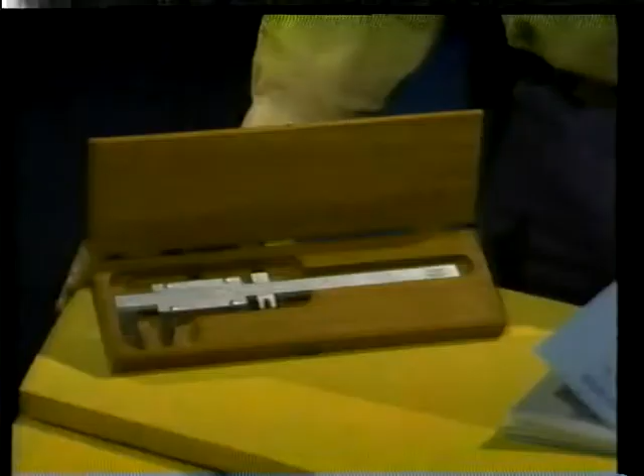For such precision measurements, we need precision tools. Now, as a general rule, the more precise a measurement tool is, the more delicate and expensive it is. So, as we talk about precision measurement tools, we'll be seeing certain precautions to be taken when using and storing them. Precautions like storing them in wooden boxes to protect them from being damaged.

The first precision measurement tool we'll be talking about is this one, the Vernier Caliper. The Vernier Caliper gets its name from the 17th century French mathematician Pierre Vernier, who invented the principle this tool is based on. Now, the first thing you might notice is that the Vernier Caliper is very similar to the slide caliper. Like the slide caliper, the Vernier Caliper has a fixed jaw and a sliding jaw that moves along the shank of the frame.

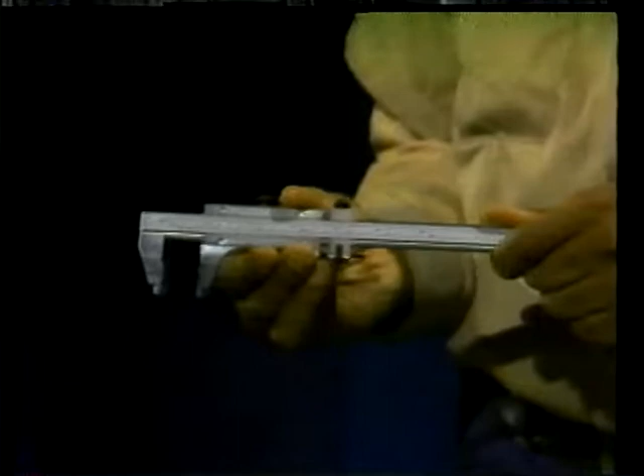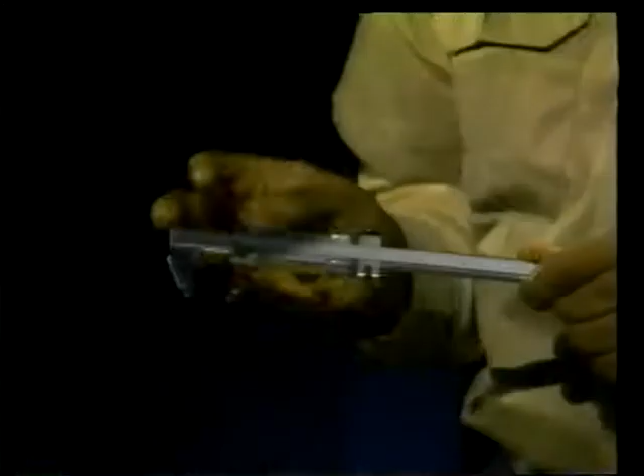The main scale is stamped along the length of the shank. Like the slide caliper, the Vernier Caliper can take inside and outside measurements, but the measurements must be taken using different parts of the scale. On this Vernier Caliper, the upper scale is used for inside measurements, and the lower scale is used for outside measurements. But this arrangement will vary with different Vernier calipers, so when taking measurements, be certain to use the correct scale.

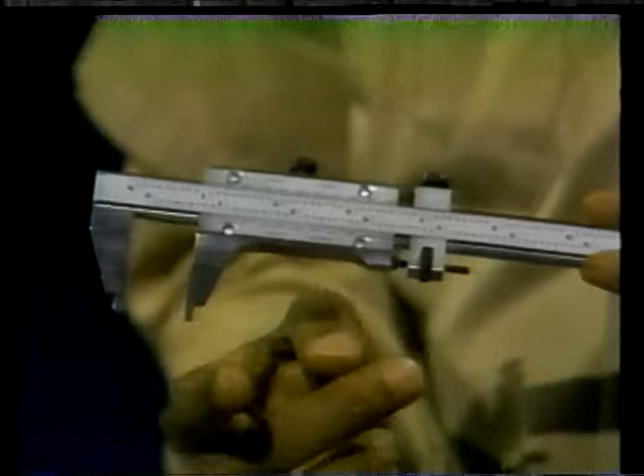The major difference between sliding calipers and Vernier calipers is this second, smaller scale on the sliding jaw. This is the Vernier Scale, and it's what makes this tool a Vernier Caliper. Notice also that there's a special adjustment device attached to the sliding jaw. The adjusting nut at the bottom of this device is a kind of fine-tuning adjustment. Turning the nut one way or the other moves the sliding jaw back and forth very gradually. Using this Vernier Caliper, we can get measurements accurate to a thousandth. And once you learn how to read the small Vernier scale accurately, you can get fairly precise readings for ten-thousandths also. So, before we attempt to measure anything, we'd better look at how to read a Vernier scale.

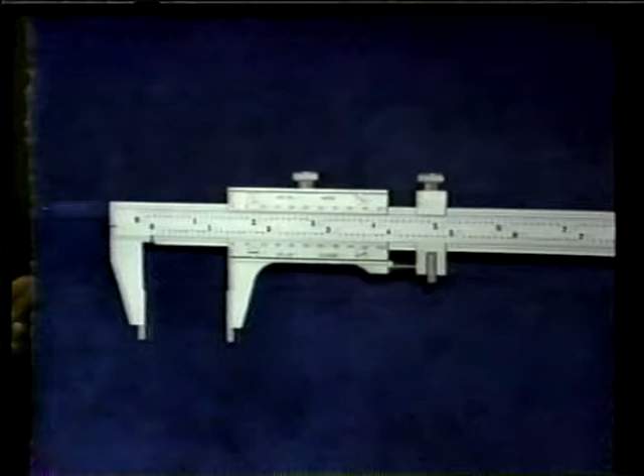Since a real Vernier caliper is too small to see clearly during this demonstration, we've constructed a model. Not all Vernier calipers are identical to this one, but Vernier calipers are similar enough that what we'll learn on this model can be applied to most Vernier calipers you'll work with. Here we have the fixed jaw, the sliding jaw, the main scale, the Vernier scale, and the adjusting device. Let's begin with the main scale.

Like other rules we've seen, the main scale is divided into specific units of measurement. This is an English measure Vernier caliper, so the basic unit here is the inch. The large numbers and longest lines represent full inches. You can see that on this particular caliper, there are 10 numbered lines between each set of inch marks. Each of these smaller numbers represents 1/10 of an inch. So, for example, here we have the 1 inch mark, the 1 1/10 inch mark, 1 2/10, 1 3/10, and so on.

In turn, each of the tenths is divided in half. Each of these small lines then represents 1/2 tenth or 1/20th of an inch. On the main scale of this caliper then, there are 3 sets of marks: full inches, tenths of inches, and 20ths of inches. This means that the smallest measurement we can make using the main scale is a 20th of an inch.

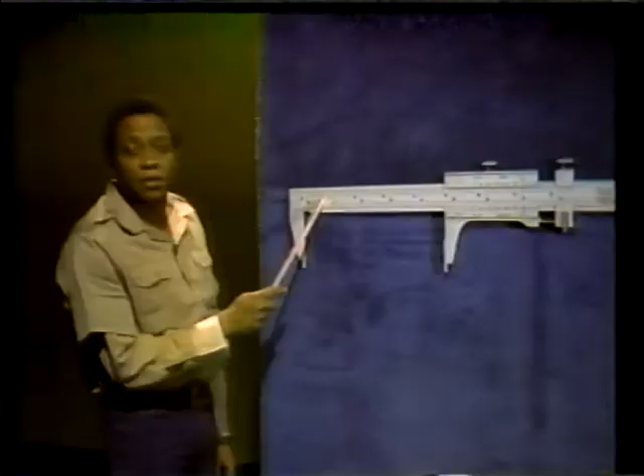But remember, we said that we want to measure accurately down to thousandths of an inch. To mark off single thousandths on the main scale, we'd have to draw 50 lines within each of these small gradations. The lines would be so close together, it would be almost impossible to read the measurement accurately. When Pierre Vernier tackled this problem almost 400 years ago, the solution he came up with was the Vernier Scale. The Vernier Scale on this model consists of 50 gradations, with every fifth one numbered.

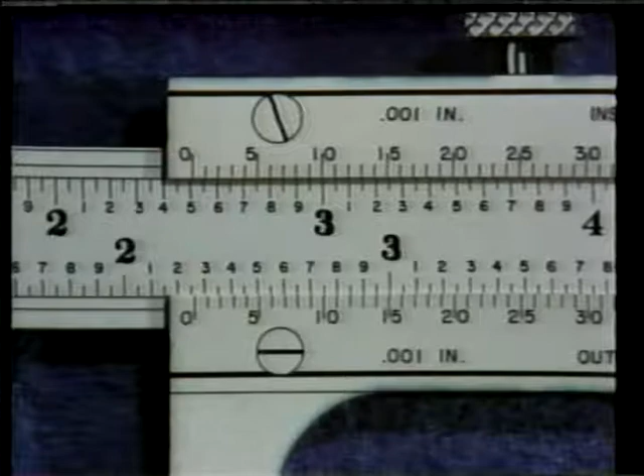Your text explains the scale in detail, but for now we need to know only how it's used to take measurements. Okay, let's say we're measuring the outside diameter on an object, and the jaws of the caliper are now locked in their proper position. Let's take a look at the lower scales, the ones marked outside. We're going to take the reading in 4 parts. The 0 mark on the Vernier scale marks the point where we take our first 3 readings. In this case, the 0 falls between the 2-inch and 3-inch mark on the main scale.

So we know that the object measures at least 2 full inches. Next, we count the number of full tenths on the main scale up to the 0 on the Vernier scale. That's 2 tenths. And we can write that down right here.

Then we count the number of 20ths between the 2 tenths mark and the 0 mark on the Vernier scale. Here the reading is 1/20th, which equals 5/100ths. That completes the first 3 parts of our measurement.

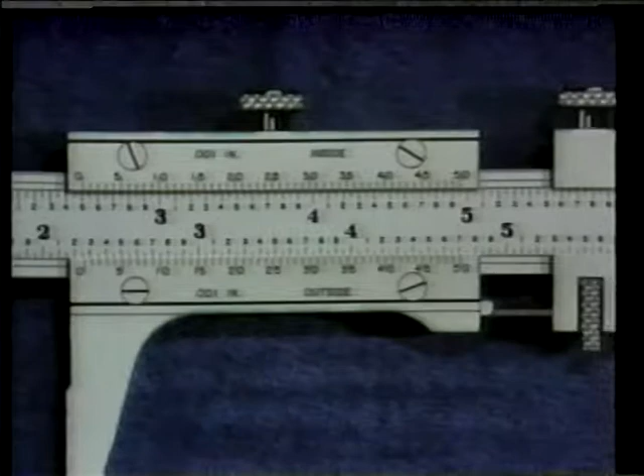Now we're getting down to the real precision. We're looking to find out how many thousandths there are between this 20th mark and the 0 on the Vernier scale. The way we do this is to search along the Vernier scale until we find the mark that lines up perfectly with any mark on the main scale. So we add, it looks like 11 there to me, we add 11 thousandths to our column of numbers.

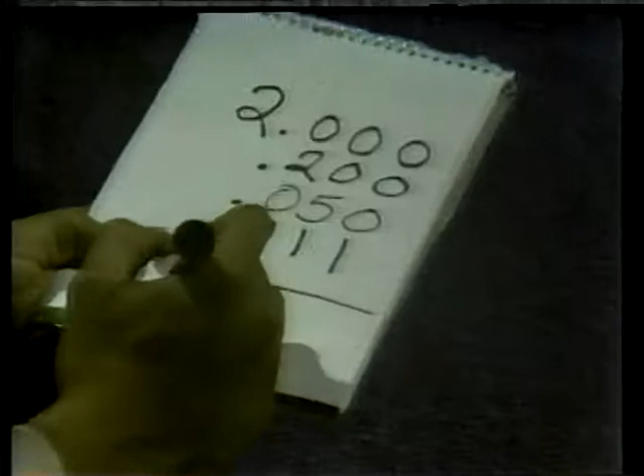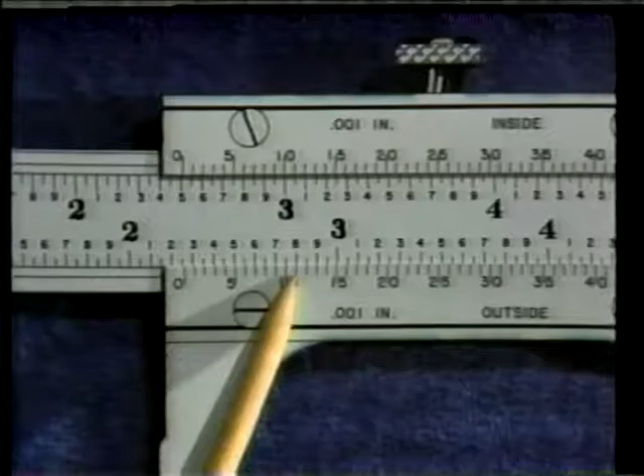And we add the numbers up. The complete reading is 2.261 inches. In review, what we've done to get this measurement is to add the number of full inches, tenths of inches, 20ths, and thousandths. Your text explains the procedure in more detail, but before you turn to your text, let's see how a Vernier caliper is used to take a measurement.

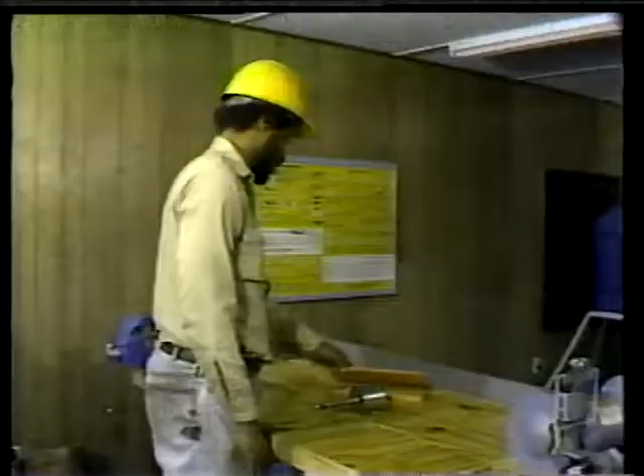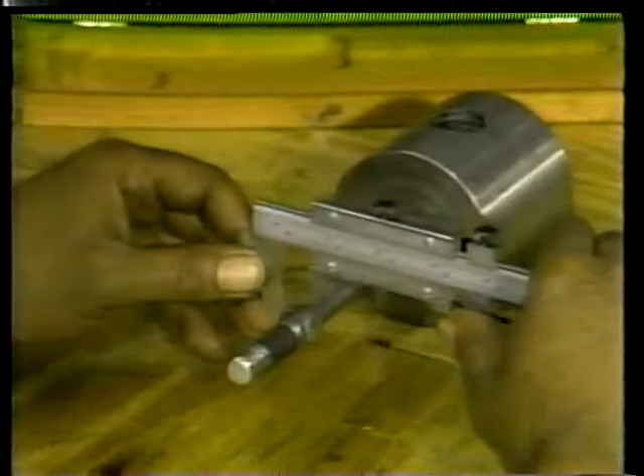Since Vernier calipers should always be stored with both the sliding scale and adjusting device locked in place, the first step is to loosen both locking screw nuts so that the sliding jaw can move freely. The jaws are then set at the approximate diameter to be measured, and the caliper is set on the work. By locking the adjusting device in place, the mechanic can make final adjustments to the sliding jaw by turning the horizontal adjusting screw nut at the bottom of the adjusting device.

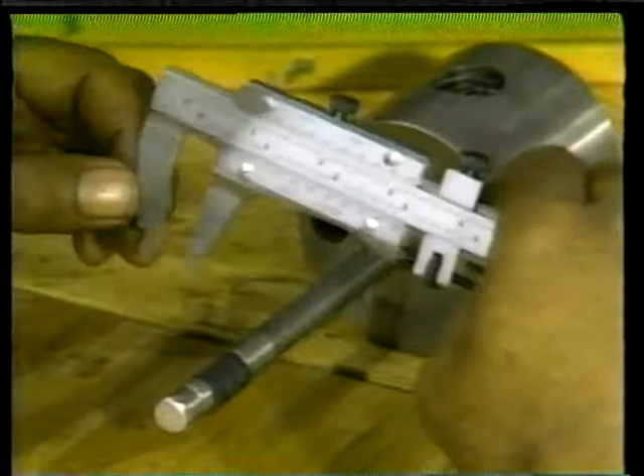He adjusts the jaws until he feels the right amount of drag between the caliper and the work. His sense of touch tells him when his measurement is correct. He then removes the caliper from the work and locks the sliding jaw in place before taking his reading. So that you can look at the reading on the caliper we just saw, I'll set up an identical reading on the model here. Okay, let's see what we have.

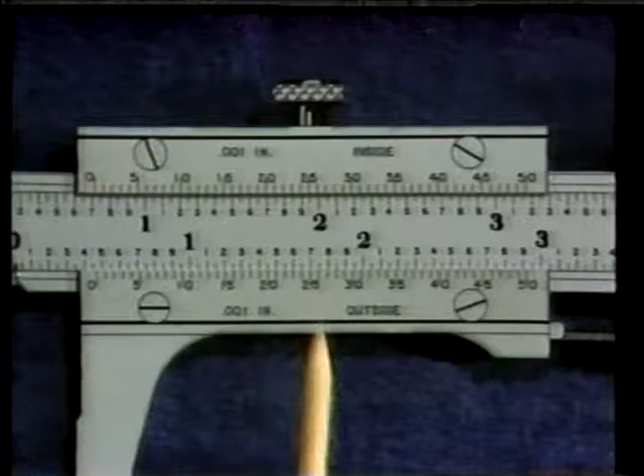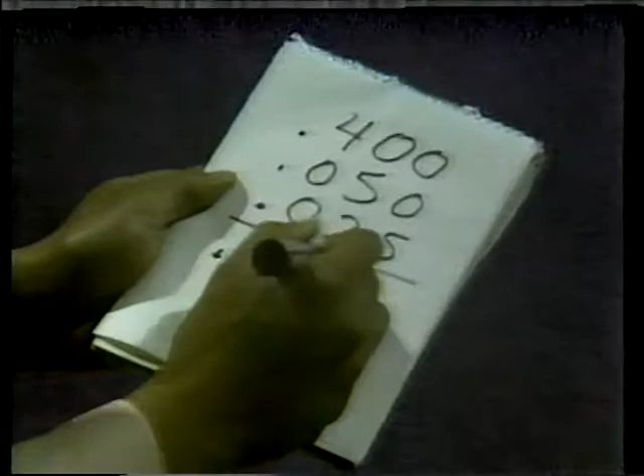Well, we don't have any full inches, but we do have 4/10. In addition, we have 1/20, which equals 5/100. And as we look along the Vernier scale, we see that the 25 line coincides with the line on the main scale. So we know we have 25 thousandths. Adding them together, we get a measurement of 475 thousandths of an inch.

That completes our discussion of Vernier calipers, but as we'll see, other precision measurement tools also use the Vernier scale. So take this opportunity to read through section 1 of your text and work out the problems you'll find there. When you feel confident taking accurate readings on the Vernier scale, we'll look at another precision measurement tool that's even more common than the Vernier caliper.

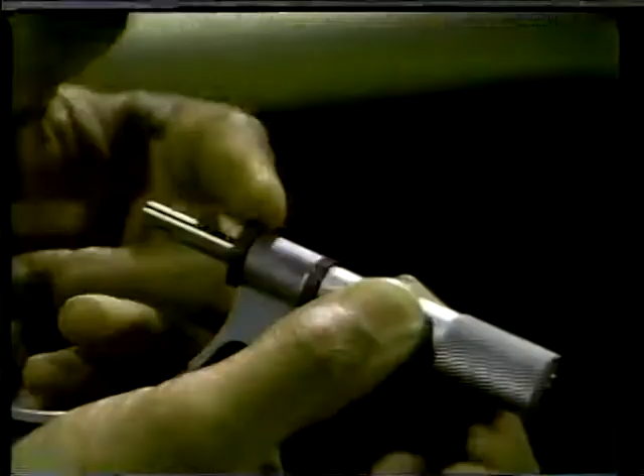Like the Vernier caliper we saw in the last segment, the micrometer is used to measure to the nearest thousandth. The measurement is made between these two parts, the anvil and the spindle. The spindle can be locked into place with this lock nut. The section here is called the sleeve. Stamped or engraved in the sleeve is the main scale. And the part that rotates on the sleeve is the thimble.

Rotating the thimble in one direction moves the spindle toward the anvil. Rotating it in the other direction moves it away from the anvil. As you can see, the thimble has a scale along its beveled edge. This flat curved part that connects the anvil to the rest of the mic is the frame. The frame provides a handle to hold while taking measurements. Typically, outside micrometers are referred to by size.

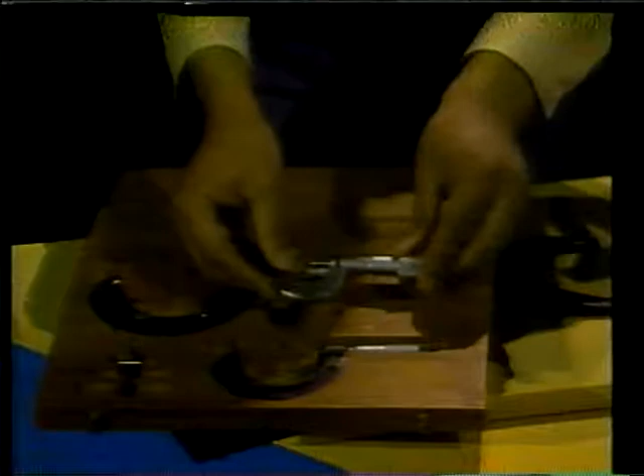Here we have 3 different size mics. Now this is a 1-inch outside mic. It can measure only dimensions from 0 to 1 inch. Over here we have a 2-inch mic, on the other hand, which measures only dimensions between 1 and 2 inches. And this 3-inch mic measures only from 2 to 3 inches.

Outside micrometers are made as large as 24 inches, but most of them have a range of only 1 inch. So, for example, an 18-inch micrometer can measure only dimensions between 17 and 18 inches. This means that the first thing you have to do to take a measurement is to guesstimate to the nearest inch the size of the work you're measuring. Then you can select the correct micrometer to do the job.

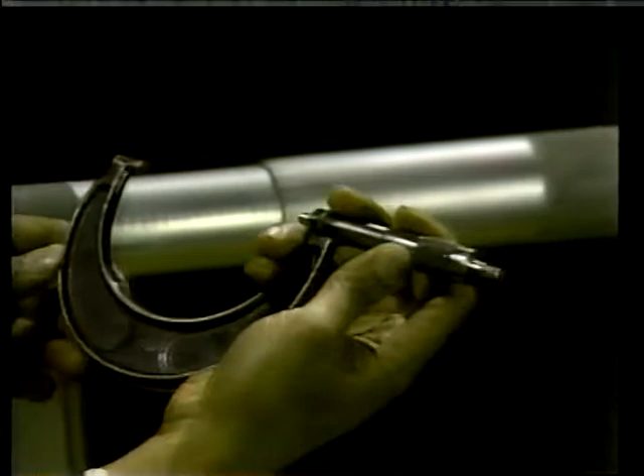When taking measurements with an outside mic, it's important that you hold the tool in a comfortable position, a position that allows you to turn the thimble as well as the work you're measuring. Depending on the size of your hand, mics up to about 5 inches are most easily held like this. My last 2 fingers are hooked through the frame, freeing my thumb and forefinger to turn the knurled nut or the thimble. Also, the other hand is free to hold the object I'm measuring and to work the lock nut.

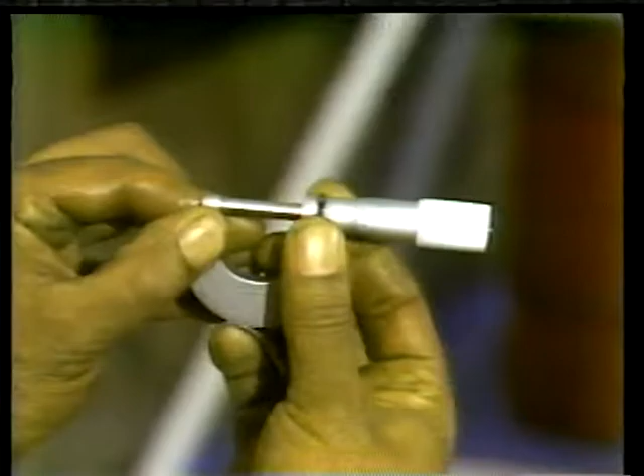Okay, now let's watch the correct procedure for measuring round stock with an outside mic. Since the stock we'll be measuring is less than 1 inch in diameter, the mechanic selects the 1-inch mic for the job. To prevent their being damaged, the moving parts of micrometers should always be locked in storage, so the first step is to unlock the thimble and spindle. Then he opens the tool to approximately the diameter he's measuring. Holding the mic properly, he sets the work between the anvil and the spindle. Then he turns the knurled nut until a slight pressure indicates that spindle and anvil are in contact with the widest part of the work. He then locks the spindle in position and removes the mic to take a reading.

Once the reading is made, he unlocks the spindle and returns it to its storage position. Notice that he doesn't tighten the spindle against the anvil. He leaves a slight gap in case the metal expands in storage. Then he locks the moving parts and sets the tool back in its wooden box.

To prevent over-tightening the spindle against the work, you can use a mic that has a ratchet stop at the end of the thimble. The ratchet stop is designed to slip with a loud click when the pressure of the spindle against the surface is just right. When you hear that click, you know that the spindle is in proper position.

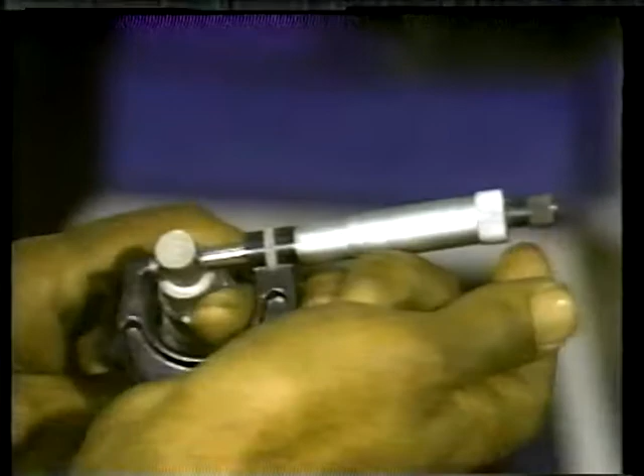The ratchet stop can, of course, be used when measuring flat surfaces as well, but there's not as much danger of accidentally over-tightening the spindle against a flat surface. This is because on flat surfaces, the entire face of both the anvil and the spindle are in contact with the surface and the pressure is distributed evenly. Well, now that we've seen how to use an outside mic correctly, how do we read a micrometer? Again, to make the procedure easier to see, we'll use a working model.

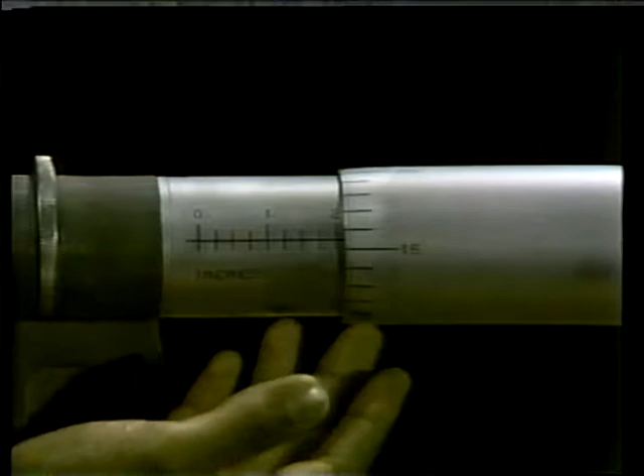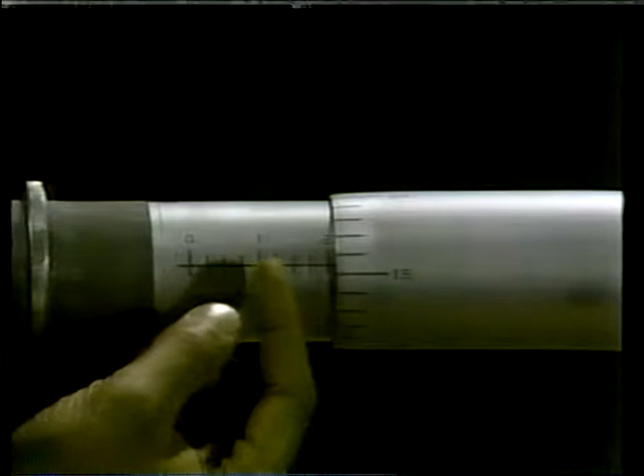Before we take a reading, let's spend a few minutes studying the 2 scales on this micrometer. First, there's the main scale on the sleeve. The main scale runs from 0 up to 10 along this line, called the reading line. Of course, with the micrometer set like this, we can only see the first 2 numbered lines. Each numbered line represents 1/10 of an inch. So, for example, here we have 0, 1/10, 2/10, and so on. In turn, each tenth is divided into 4 equal parts, each 25 thousandths of an inch.

Now, what about the thimble scale? The thimble scale starts at 0, and each gradation is exactly 1/1000th. Right now, the 0 line on the scale is even with the reading line, so the reading is 0 thousandths. Now it reads 1/1000th, 2/1000ths, 3/1000ths, and so on. The scale goes up to 25 thousandths, which brings the reading back to 0.

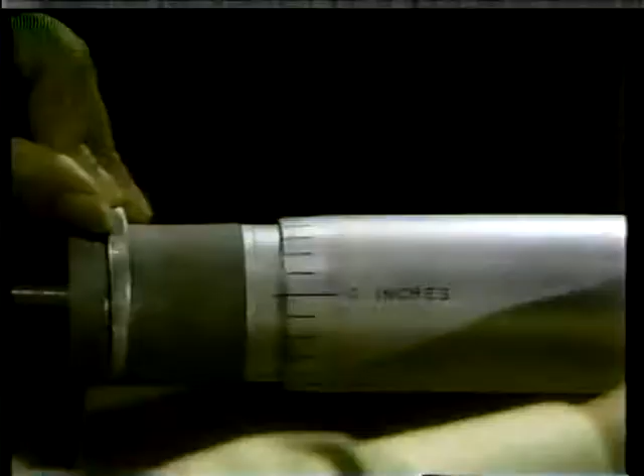Now, all this might seem complicated and confusing, but let's set the micrometer at 0 and start at the beginning. Just take a moment to wind it down. All right, we're almost there. Okay, 0. When the 0 on the thimble scale is even with the reading line at 0 on the main scale, the distance between the spindle and the anvil is 0. When I turn the thimble so that the first mark lines up with the reading line, the distance between the spindle and anvil is 1/1000th.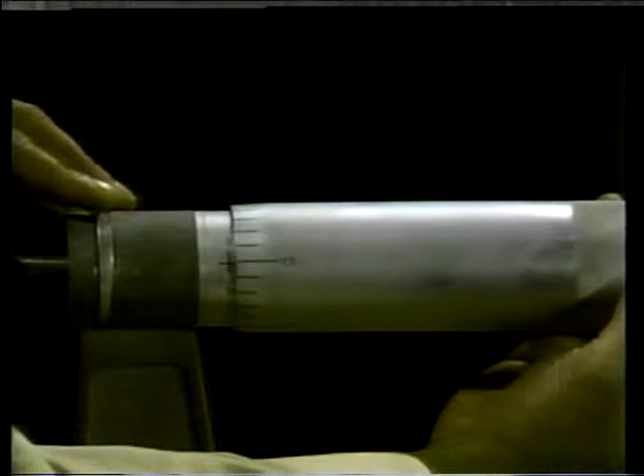Now it's 2/1000ths, 3/1000ths, 4/1000ths, 5/1000ths, 10/1000ths, 15/1000ths, 20/1000ths, and 25/1000ths, which brings the thimble scale back to 0. Remember, we said that the marks on the main scale are 25/1000ths apart. So it shouldn't surprise us to find that when the thimble reads 25/1000ths, the thimble scale lines up exactly with the first mark on the main scale.

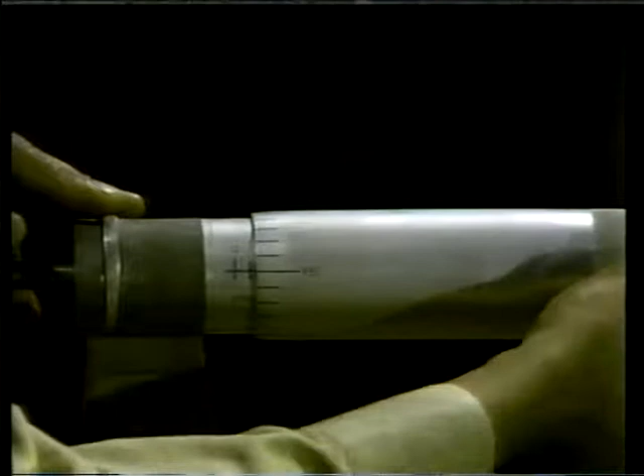And going on from this point, we have 26/1000ths, 27/1000ths, 30/1000ths, and when we reach 50/1000ths, the 0 on the thimble lines up with the second line on the main scale. So far, so good. We know that each complete turn of the thimble moves the thimble exactly 25/1000ths along the main scale. So our next complete turn takes us up to 75/1000ths, the third mark on the main scale.

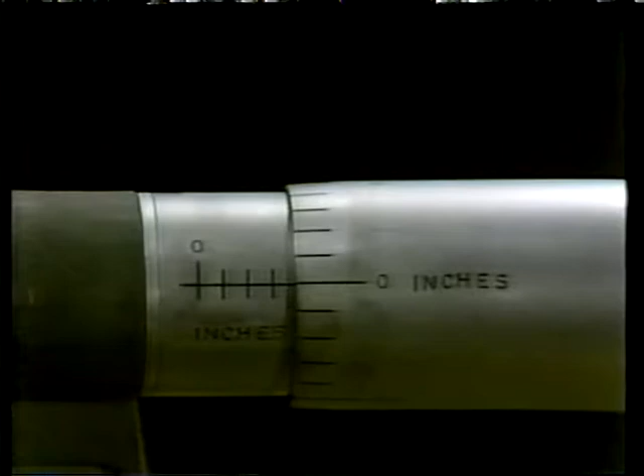And our fourth turn then takes us up to 100/1000ths, the first 1/10th mark on the main scale. One experienced mechanic told me that the way he learned how to read a micrometer was by the spare change method. He told me to think of each thousandth as a penny. Just as every dollar is 100 pennies, every numbered gradation on the main scale is 100/1000ths. And just as every quarter equals 25 pennies, each of the 4 smaller gradations is 25/1000ths. In effect, then, the thimble counts individual pennies.

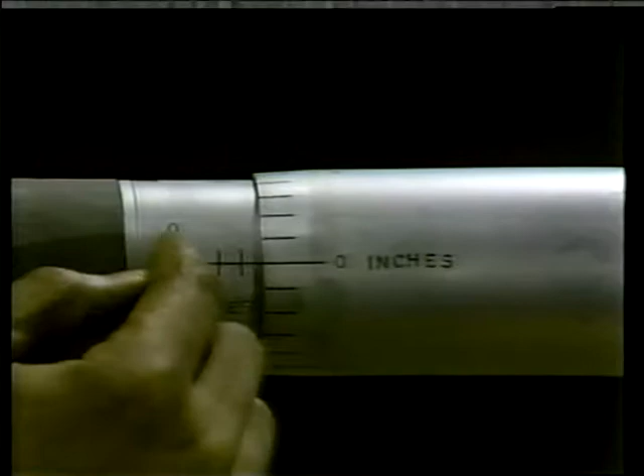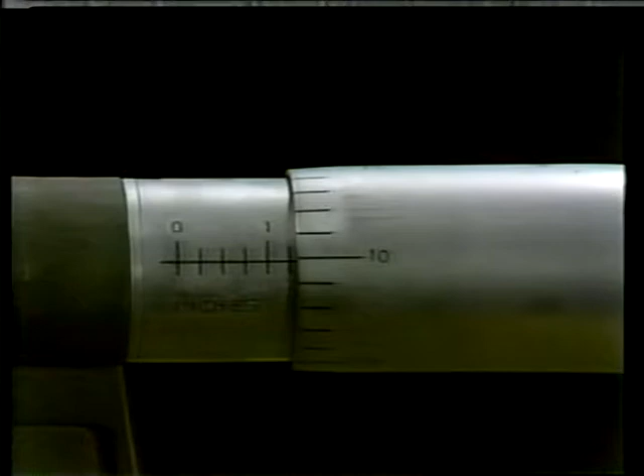So here we have $1, 1 quarter, and 10 pennies. That's $1.35, or 135/1000ths of an inch. Your text has exercises to help you learn to read a micrometer accurately to the nearest

thousandth. It also includes information on Vernier micrometers, which have Vernier scales that give precise readings in 10,000ths. So, now that we've talked about how to use an outside micrometer, take some time out, look it up in your text, go over it. Any questions you have, take them to your instructor and have him clear them up.

Now, all the micrometers we've seen so far can be used to measure only outside dimensions, but you need to be able to measure inside dimensions also, as well as the depth of holes and recesses. For those types of measurements, you need these tools: an inside micrometer and a depth micrometer. As you can see, both types have the same types of scales as the outside mics we've already seen: a main scale and a thimble scale. This means that they're read basically the same way as outside micrometers are.

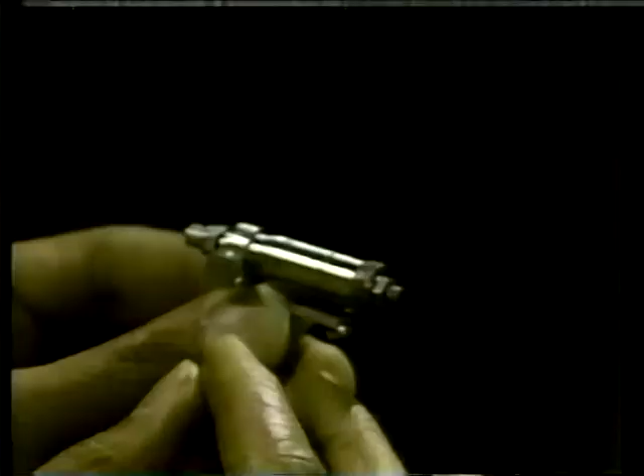Let's look at the inside micrometer first. The way it is here, with the thimble and main scales aligned at 0, the mic is exactly 2 inches long. This means that 2 inches is the smallest diameter this inside micrometer can measure.

If we turn the thimble all the way to the end of the main scale, it'll take us a couple of seconds to get that done. Okay, 3, 5. The spindle scale only goes up to 5/10 or 1/2 inch. So actually, the way it is here, this micrometer can measure only dimensions between 2 and 2.5 inches.

That hardly makes it a versatile tool. What, for example, would you use to measure an inside dimension between 2.5 and 3 inches? You'd use one of these extensions. We know that the mic, the way it is, will measure from 2 to 2.5 inches. So to measure something between 2.5 and 3 inches, we need a 1/2 inch extension.

We loosen the locking nut here, slide this rod out of the mic, slip on the 1/2 inch collar, and lock that rod back in place. Now we can measure dimensions between 2.5 and 3 inches. How about 3 to 3.5 inches? Well, just select the rod marked 3 inches to 4 inches and insert it in the mic. To measure 4 to 4.5 inches, add that 1/2 inch collar to the rod.

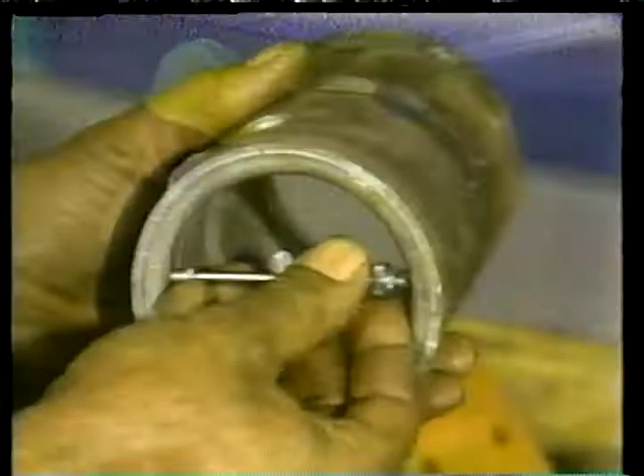When the mic is in place inside the pipe, he begins turning the thimble counterclockwise. Notice that on an inside micrometer, the rod does not move. Only the thimble moves along the sleeve, expanding the total length of the mic. He turns the thimble until the ends of the mic are snugly against directly opposite points. He rocks the mic back and forth from side to side to find the true diameter, turning the thimble as necessary to adjust the length of the mic.

When his sense of touch tells him that he has the true measurement, he removes the mic from the work. He then locks the thimble to prevent it from shifting and losing the measurement, and takes a reading on the scale. Measurements are read on an inside mic the same way they are on an outside mic. Just know the length of the extension or extensions you're using, and be sure to add that length to the reading on the scales.

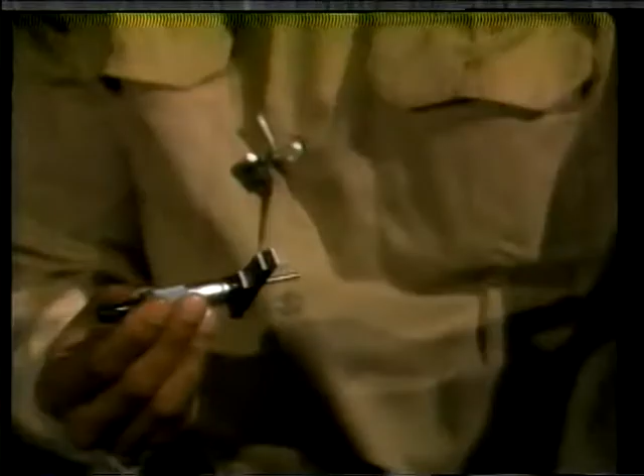The micrometer depth gauge, or depth mic, also uses a system of extension rods. So the procedure for using a depth mic is very similar to the procedure for using an inside mic. First, use a depth rule to get a coarse measurement of the depth of the hole. Then insert the rod you need into the mic. On this particular depth mic, the rod is inserted by removing the ratchet at the top. Put it back in, and we're all set to take our measurement.

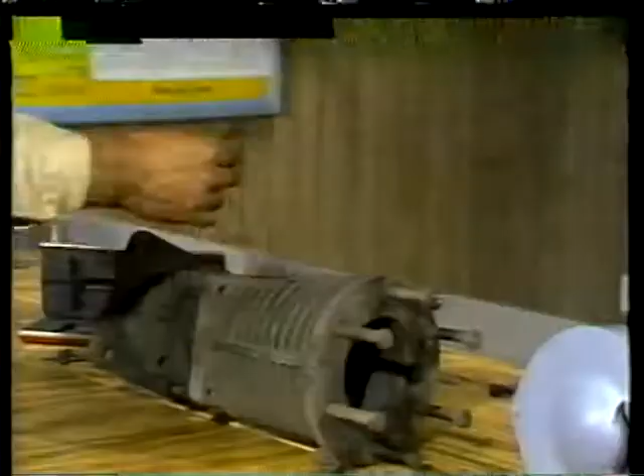Before inserting the rod into the hole, adjust the mic so that the length of rod is less than the coarse measurement you took. This ensures that the tip of the rod will not scrape bottom and possibly be damaged. Then insert the rod in the hole and hold the base of the crosspiece firmly and evenly against the lip of the opening. Since the mic he's using has a ratchet stop, he simply turns the ratchet stop until a loud click tells him that the tip of the rod has reached bottom. Then he locks the rod in position and removes the mic to take this reading.

Now, reading a depth mic is different from reading an outside or inside mic. This is because the scale is reversed on a depth mic. Instead of reading from 0 to 10, the main scale reads from 10 to 0. This means that the section of the scale you're actually reading is covered by the thimble. So, for example, the reading on this mic is 675 thousandths, one full gradation short of 7/10. Again, your text has exercises you can do to build your skill at reading depth micrometers.

In the last two segments, we've seen the outside mic, the depth mic, the inside mic, and we've watched demonstrations of how to use each one properly. But there's still a lot we haven't covered. Notice, for example, that like other precision measurement tools, micrometers are stored in boxes to protect them in storage. And we haven't mentioned anything about checking the accuracy of a micrometer before using it, a very important point. We'll discuss these points in another segment on care and calibration.

But right now, turn off the videotape and read through the micrometers section of your text. When you're finished working through the exercises, your instructor will review your answers and discuss any questions you might have.

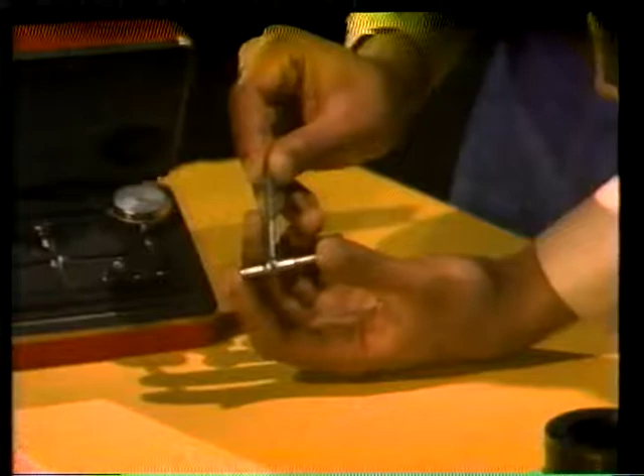The cross arms at the end of the handle retract and expand, giving the telescoping gauge its name. Now, these cross arms can be locked into position by twisting the base of the handle like you would in an old-fashioned razor. There. Telescoping gauges come in a variety of sizes, each with a specific range. This one has a range of 1 1/4 inches to 2 1/8 inches. And they're available with cross arms that can measure inside diameters from as small as 5/16 of an inch or as large as 6 inches.

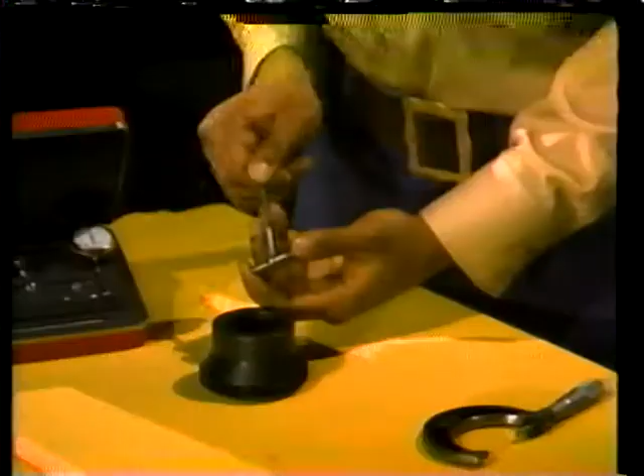Another feature that you should be aware of is that the ends of the cross arms here are rounded. This rounding enables them to fit against curved surfaces, such as the inside walls of pipes and machine parts. The rounded ends also help in finding the true diameter of the part you're measuring. To show you what I mean, let's measure the inside diameter of this coupling hub. First, I unlock the cross arms and squeeze it to fit inside the hub. Then I lock the cross arm and insert it in place.

Notice that I position the cross arm so that one end is slightly higher than the other. As I unlock the cross arms, it expands until its ends touch opposite points. Because the ends of the cross arms are rounded, as we saw before, the cross arms find the widest dimensions almost automatically. I can pull the lower end of the cross arms upward like this. When the ends of the cross arms are directly opposite one another, the cross arms have retracted to fit the dimensions of the hub. The lock is then tightened just enough to hold the cross arms in that position while I remove the gauge from the work.

Now that I've tightened the lock to hold the measurement securely, I can take a reading with an outside mic. Following the same procedure I normally would when using a mic, I measure the length of the cross arms, inserting it right in there like that.

Telescoping gauges are particularly useful in applications where a regular inside micrometer is too large or too awkward to use. Now, the dial indicator is used to take a different type of measurement. It's designed to measure changes in dimension. To see what I mean, let's look at the parts and functions of this dial indicator.

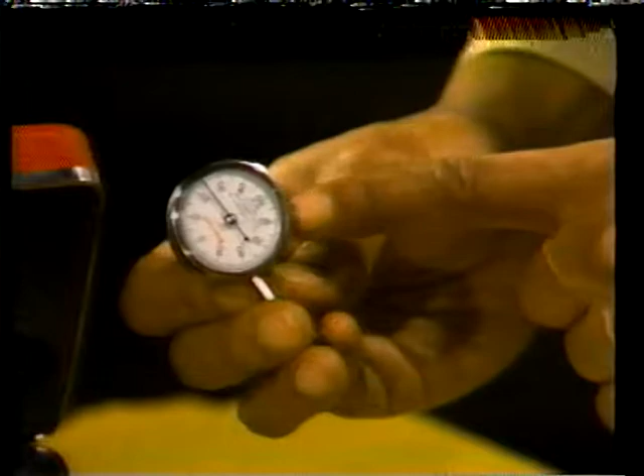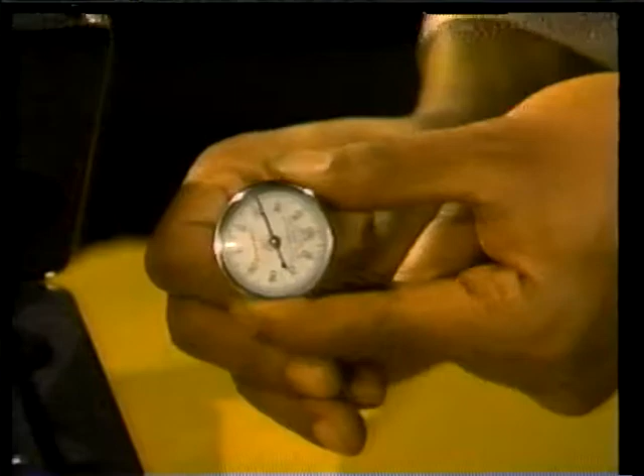Here, of course, is the dial. This one is graduated in thousandths, which is the most commonly used graduation. Although you probably won't be using one, some dial indicators can accurately measure in 50 millionths. Using the outside ring here, you can rotate the face of the dial to adjust to reading anything you want. We'll see why that's useful in just a minute.

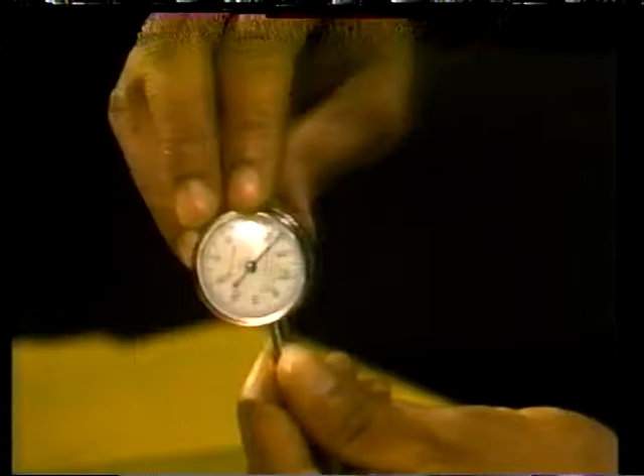Now, the stem extending from the dial is the part that actually takes the measurement. You can see that as I depress the stem, the distance the stem moves registers in thousandths on the dial. By mounting the dial indicator in a stand like this one with a magnetic base, the dial is held steady during measurement. Magnetic base stands are not the only types you can use. In many cases, you can use a stand that clamps to the work or a work table.

What kind of things do you measure with a dial indicator? One of the most common uses for a dial indicator is taking run-out readings on shafts and other rotating parts. A run-out reading is a measurement that checks the straightness or roundness of a rotating part. Here, for example, the mechanic is taking a run-out reading on a rotor from a screw-type pump. He first mounts the rotor on a pair of V-blocks. Then he sets the dial indicator and stand near one end of the rotor, pressing the stem of the indicator against the rotor until he gets a reading of at least 5 thousandths.

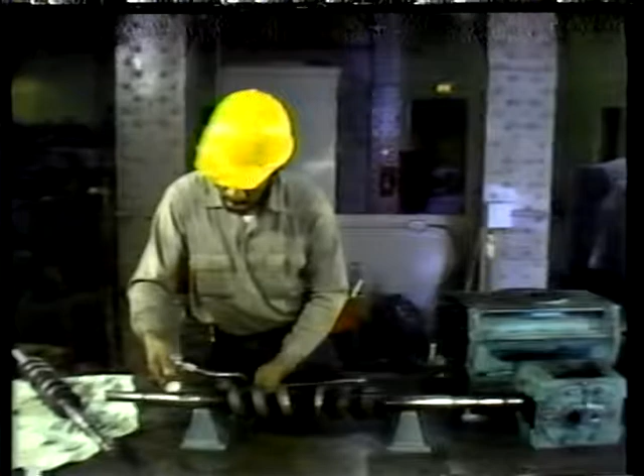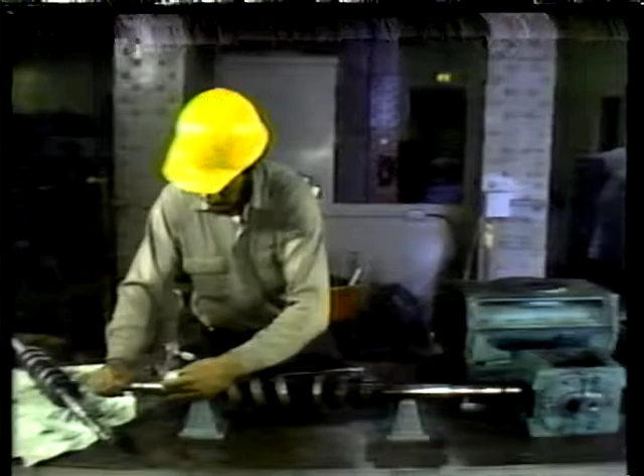He then sets the dial indicator to 0, or zeros it, as the procedure is called. With the rotor in place and the dial zeroed, all he does is slowly rotate the rotor, keeping an eye on the dial. Any change in the reading indicates some irregularity in the rotor. A slow movement of the needle usually indicates that the part is bent or out of round. After taking a reading at one end, he repeats the procedure at the other, again being sure to press the stem of the indicator against the rotor and then zero the dial before starting. This rotor seems to be in pretty good shape.

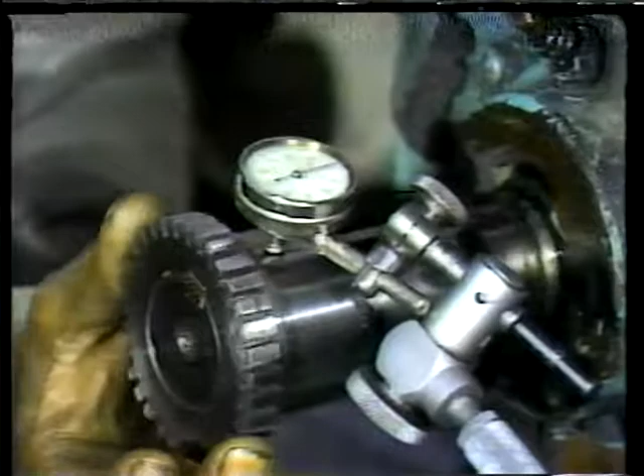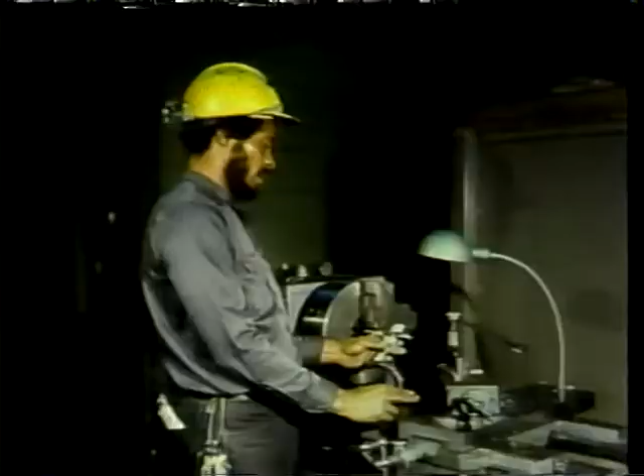Of course, the part you're taking a run-out reading on doesn't have to be mounted on V-blocks. Here, the run-out of a coupling hub is being checked with the hub in place on the motor shaft. The part you're measuring can also be mounted in a lathe, but remember to rotate the part by hand. Never try taking a run-out reading on an operating piece of equipment. You'll end up damaging the dial indicator and possibly yourself. Always shut the equipment down, and if necessary, tag it out to prevent it from being started up accidentally.

Now, as with other precision measurement tools, the metal parts of a dial indicator should be cleaned with a lightly oiled rag after use. The film of oil helps to protect the metal from corrosion. A dial indicator should also be stored in its special case to prevent it from banging around. Aside from additional material you'll find in your text, that pretty well covers telescoping gauges and dial indicators. It also brings us to the end of our discussion of precision measurement tools that have moving parts. The tools we'll see in the next segment have no moving parts, but as we'll see, that doesn't prevent them from giving accurate measurements.

All of the precision measuring tools that we've discussed so far have moving parts. Micrometers have spindles and thimbles. Vernier calipers have sliding scales. Telescoping gauges have retractable cross arms, and so on. But several types of precision measurement tools have no moving parts. Because of this, they're called fixed measurement gauges. These are the fixed gauges we'll talk about in this segment.

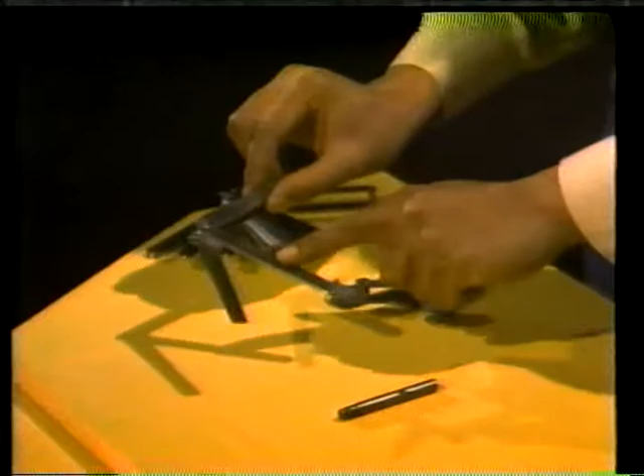The thickness or feeler gauge, the taper or wedge gauge, the thread gauge or screw pitch gauge, the wire and sheet metal gauge, and the go, no-go gauge. Each has a different use, as we'll see. Let's begin with the thickness or feeler gauge.

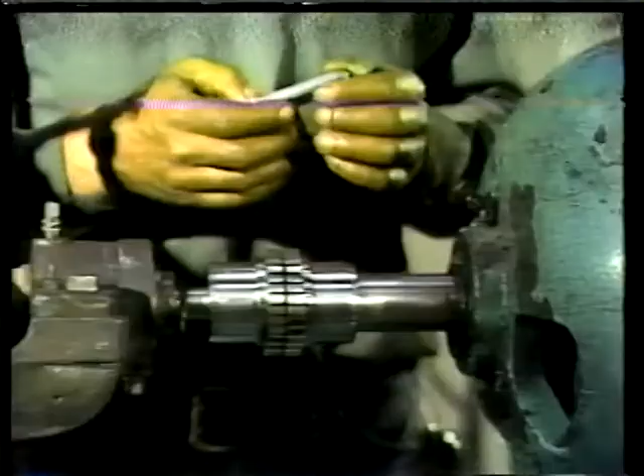The thickness gauge is really a set of thin metal blades. Each blade is precisely machined to an exact thickness, and the thickness of each blade is stamped right on it. To measure the clearance between these coupling hubs, for example, the mechanic first selects a combination of blades that approximates the dimensions of the gap. His first combination is too thick to fit between the hubs, and he doesn't force the blades into the gap. Forcing them could damage the blades, ruining them permanently. On his second try, the combination is not thick enough to fill the space. For an accurate reading, the blade should fit snugly in the space being measured.

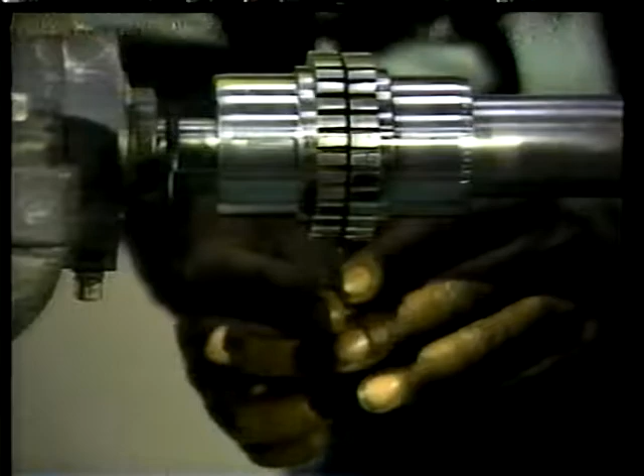By trial and error, he's found the right combination of blades. The gauge doesn't have to be forced into the gap, and at the same time, the blades fill the gap snugly. There are two ways to take a reading from a feeler gauge: by adding up the values stamped on each blade, or by measuring the blade combination with an outside mic. Using an outside mic is usually quicker, easier, and more accurate than the arithmetic method.

There's one important thing to remember about feeler gauges: they're pretty fragile. Some of the blades are as thin as a single thousandth of an inch, so you have to be careful to protect them against damage like scratches, nicks, or dents that can affect their accuracy. When measuring with a feeler gauge, never force blades into a gap, and don't bend or twist the blades out of shape. When you're finished with the gauge, fold the blades back into the handle to protect them.

And don't forget to give the blades a light coat of oil once in a while.

Another way to measure clearances is to use a taper gauge or wedge gauge. As its name tells us, the taper gauge is a carefully tapered piece of metal with a scale stamped on each side. The taper gauge is used in much the same way as a feeler gauge, by inserting it between two surfaces to measure the space between them. In measuring the distance between two coupling hubs, for example, the gauge is inserted thin end first between the hub faces.

With the gauge in position as far as it will go into the gap, the reading can be taken at the point where the outer edge of the hub touches the gauge. Like the other measurement tools we've seen, taper gauges come in a variety of sizes and are available for measuring in both English and metric units.

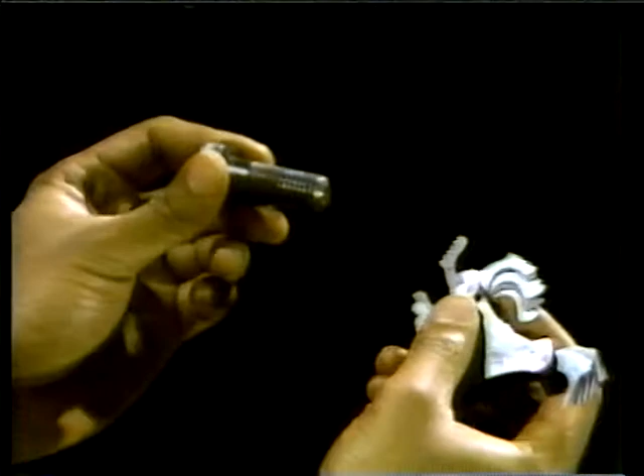If I want to know how many threads per inch this screw has, for instance, all I do is find the blade that fits the threads perfectly. Let me see, I'll guess 11 here. The best way to be sure you have a perfect match is to hold the screw and gauge up to the light.

You know you have the right blade when no light shows between the gauge and the threads. Once the right blade is located, just read the number stamped on the side of the blade. This number, 11 in this case, tells you the number of threads per inch, so I know that this screw has 11 threads per inch.

Like the feeler gauge, the screw pitch gauge should be used properly and protected from damage. Avoid using the blades as screwdrivers or small pry bars, and after using them, fold them up and store them properly.

The next measurement tool on our list is the wire and sheet metal gauge. A wire and sheet metal gauge is either a disc or a thick blade, like this one, with carefully machined slots along its edge. On one side, the slots are labeled with their width in decimal parts of an inch. On the other side, the slots are labeled with gauge equivalents.

There are different gauging system gauges for different types of metals. This one is a Birmingham standard gauge, used only on iron wire and rolled sheet steel, so the gauge equivalents stamped on it are Birmingham equivalents. Your text has more information concerning systems for gauging wire and sheet metal, but for now, let's just concentrate on learning how to use this gauge.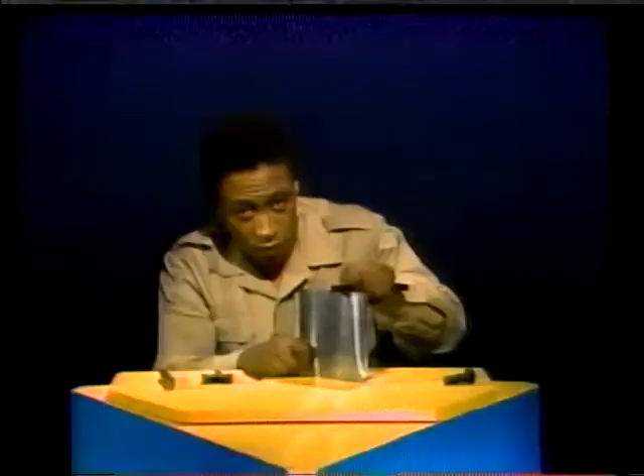That looks like a fit. The metal must fit snugly, but it must never be forced into the gauge. Okay, that looks like the right fit. Now I can find the thickness of the sheet metal in inches by looking at the number stamped next to the slot.

2/100ths of an inch. If I flip the gauge over, I find the equivalent Birmingham gauge value stamped next to the slot on the other side. So I know that this piece of sheet steel is 25 gauge. Now wire is measured in the same way.

Just find the slot that the wire fits into snugly. Remember, though, that the wire is supposed to fit in the slot at the edge of the gauge, not in the hole. Only the edge of the slot can give you an accurate measurement.

Once I find the right slot, I look on one side of the gauge for the actual thickness of the wire in inches. In this case, 25 thousandths of an inch. And then I flip the gauge over and find out that the gauge equivalent is 23. So, when measuring the thickness of wire or sheet metal, remember two things.

First, be sure the metal or wire you're measuring is clean and free of burrs, nicks, and other irregularities. And second, pick the right gauge for the job. Select a gauge designed to measure the type of metal you're working with and one that gives readings in the correct gauging system.

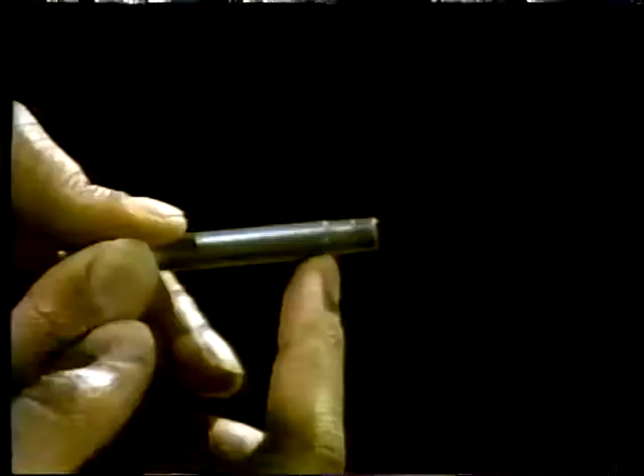The first step represents the smallest diameter the orifice can be and still be within specifications. The next step represents the largest diameter the orifice can be according to specifications. So when using the gauge, we know that if this part, the go part, fits into the opening, it is not too small. But if the second step, the no-go part, fits, then the tube orifice is too large.

Here, the go part fits the tube properly, but the no-go part does not. So the orifice being checked is within specifications. As I mentioned a moment ago, go, no-go gauges are manufactured for specific pieces of equipment. They're not designed to measure all equipment dimensions, and they aren't all this size or shape.

That concludes our list of fixed gauges. We've seen the thickness gauge, the wedge gauge, the screw pitch gauge, the wire and sheet metal gauge, and the go-no-go gauge. As I mentioned before, the thing that makes these tools fixed gauges is the fact that they take readings without moving parts.

These aren't the only fixed gauges you'll be using, though. There are dozens of other measurement tools that you'll learn to use as you spend more time on the job. But there is one general rule that applies to all precision measurement tools, whether they're fixed or have moving parts. That rule is, keep them in good shape. In the next segment, we'll see what that means.

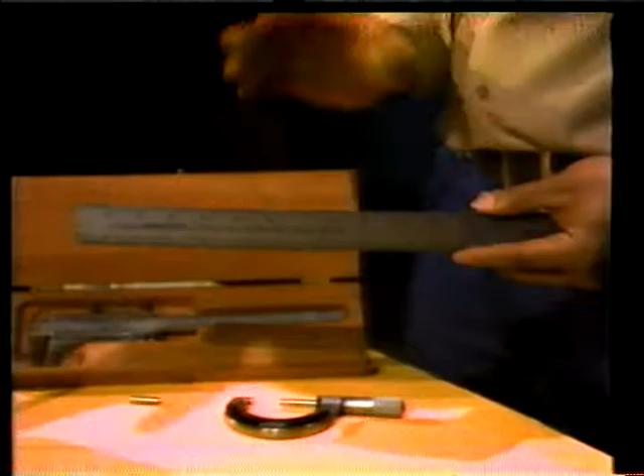Now, coarse measurement tools like rules and tapes can be checked by simply inspecting the edges and making sure they have no bends or kinks in them. You don't have to worry about the gradations being inaccurate as long as the tool itself is in good condition. But how can you tell whether or not a Vernier caliper is accurate when you go to use it? How can you tell if the scales are properly aligned? The same is true for micrometers. How can you tell whether or not a micrometer is accurate?

To answer these questions, for the next few minutes, we're going to talk about calibration. Calibration is the procedure for checking the accuracy of measurement tools and restoring their accuracy if you find them out of whack in some way. Rules concerning calibration vary from plant to plant. In some, mechanics are largely responsible for calibration. In others, only trained specialists are permitted to adjust precision measurement tools. So be sure you know your plant's procedures before attempting the calibration of any tool.

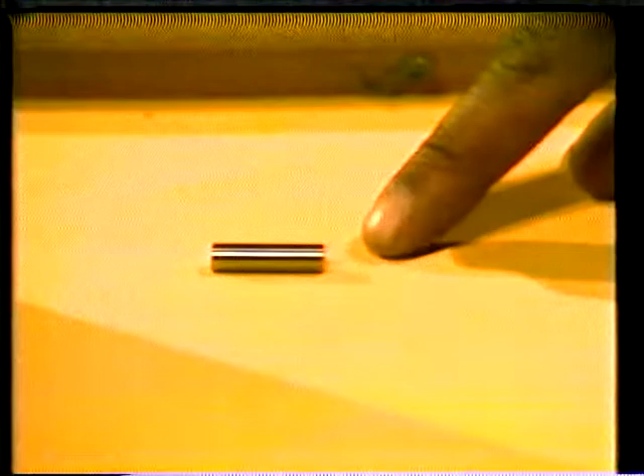The tools we'll use to check the accuracy of our measuring instruments are standards, like this one. It's precisely machined to be exactly 1 inch in length. So, by measuring this standard with some of our tools here, we'll be able to tell whether or not each tool is accurate. This standard is pretty accurate, but for the kind of precision needed in laboratories and similar situations, standards like this one are not accurate enough.

For those applications, block gauges are used to calibrate measurement tools. Block gauges are machined under the most exacting conditions, resulting in amazing precision and reliability. For this reason, block gauges like these are found in laboratories and other places where only the most reliable measurements are acceptable.

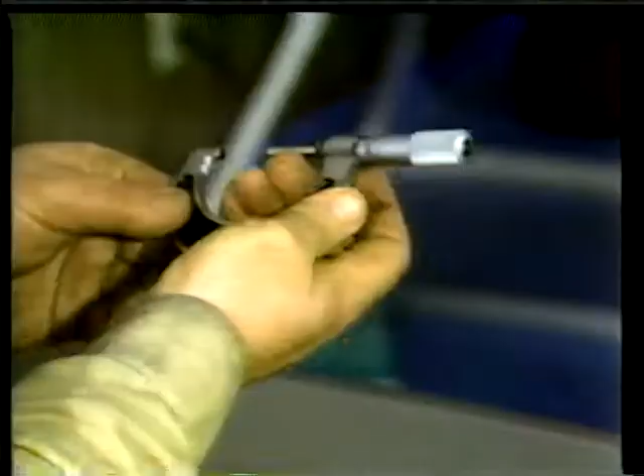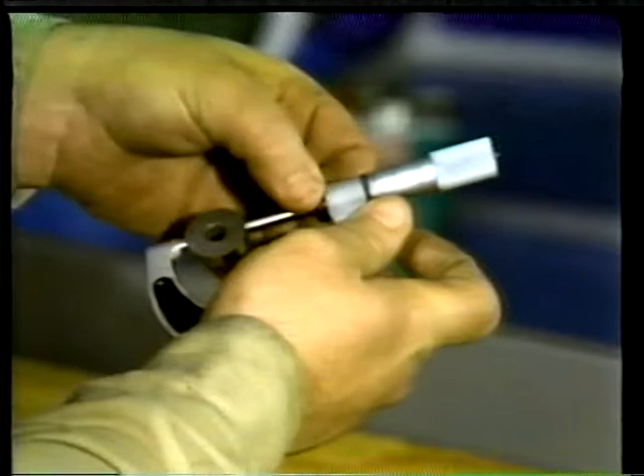For our purposes, however, any standard, as long as it's in good condition, is all we need. Here, the mechanic is checking the accuracy of an outside micrometer. He places another type of standard between the anvil and spindle and proceeds to measure it just as he would measure any other object. The reading he gets shows that the micrometer is off exactly 2 thousandths.

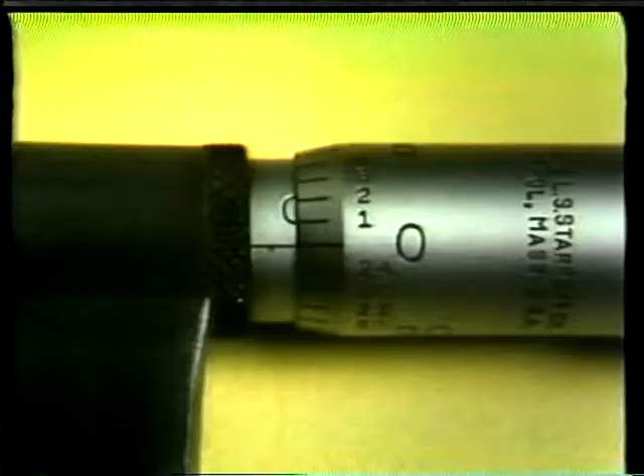To correct the error, he uses a small spanner wrench supplied by the manufacturer. The wrench fits into a small hole in the sleeve, enabling him to turn the sleeve until the scales are aligned correctly. After correcting the error, he checks his work by measuring the standard again. Right on the nose. Calibration of an inside mic doesn't require a standard or block gauge.

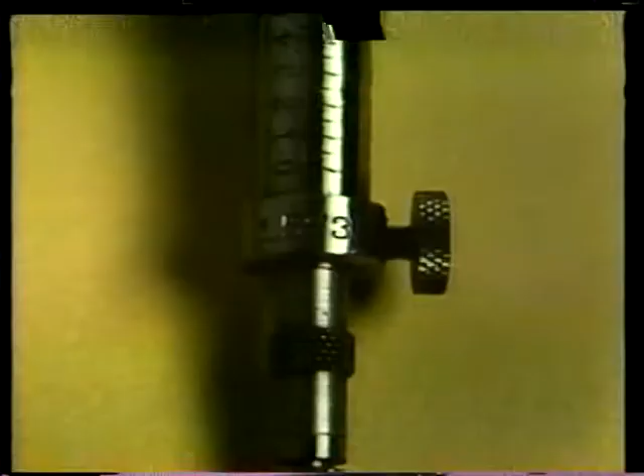If an error is found, a small wrench, usually supplied by the manufacturer, is used to adjust the nut at the base of the mic and make the correction. Then the inside mic is measured once again and the procedure repeated until its length matches the manufacturer's specification. That shows how to calibrate inside and outside mics, but what about vernier calipers?

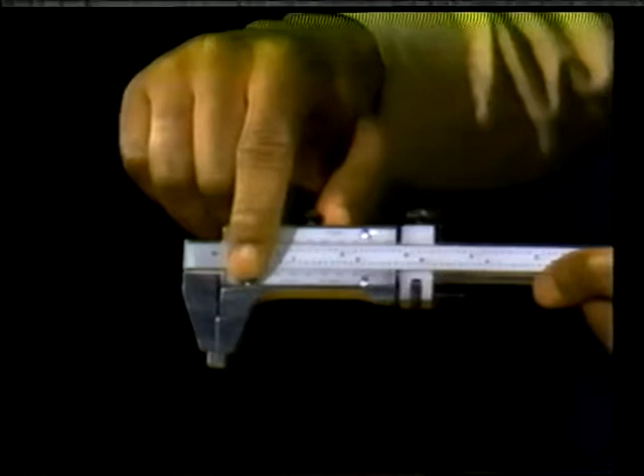Well, a vernier caliper can also be checked with a standard, but the accuracy of a caliper can be checked by simply moving the jaws against one another and being sure the scales read exactly 0. If they don't, the caliper is inaccurate and must be calibrated by loosening the screws that hold the vernier scale in place and moving the vernier until the 0 marks match. Other techniques for checking the accuracy of vernier calipers are covered in your text.

Dial indicators also must be calibrated regularly, but calibrating them demands skill and equipment found only in your plant's instrument shop. Remember that proper calibration of measurement tools is vital to precision measurement, so follow your plant's calibration procedure. If you're responsible for calibration, then make it a habit to check each tool before using it. If, on the other hand, the tools in your plant are calibrated only by a specialist, be sure the tools you use receive their regular calibration checks.

But no matter what the calibration procedure at your plant, the best way to keep your measurement tools calibrated is to take good care of them. This means both handling them properly and storing them properly. Store precision measurement tools in wooden or padded boxes where they can't be accidentally nicked, jarred, or otherwise damaged. Keep all your tools clean by wiping them after use.

A little oil on the rag will put a protective film on metal parts, preventing corrosion. Just be sure that the coat of oil isn't so heavy that dirt and grime can get trapped in it. Dirt and grit can easily ruin precision instruments by working their way into moving parts. And here's a tip many mechanics don't think about.

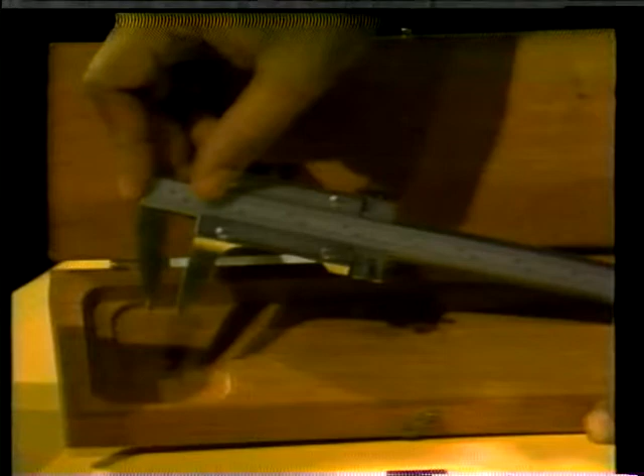When storing micrometers and vernier calipers, don't leave them set at 0. Vernier calipers and micrometers should be stored with their measuring surfaces apart so that the metal has room to expand and contract with changes in temperature. And while we're on the subject of temperature, be certain to keep your precision tools away from extremes of heat or cold that change their size and affect your measurements.

And don't forget that, like other instruments, measurement tools with moving parts must be lubricated regularly, but always follow the manufacturer's instructions. Basically, then, there are 3 rules that apply to all measurement tools. First, be sure the tool is accurate and in good shape before every job. Second, use them properly and handle them like the precision instruments they are. And third, always clean your tools after using them and be certain to store them properly.

By following these 3 rules and practicing proper measuring methods, your measurements will be reliable. And reliable measurements are the first step toward avoiding costly and time-consuming errors. So learn all you can about these tools and all the measurement tools you'll have the opportunity to use. They can make your job easier and give your work a truly professional quality.